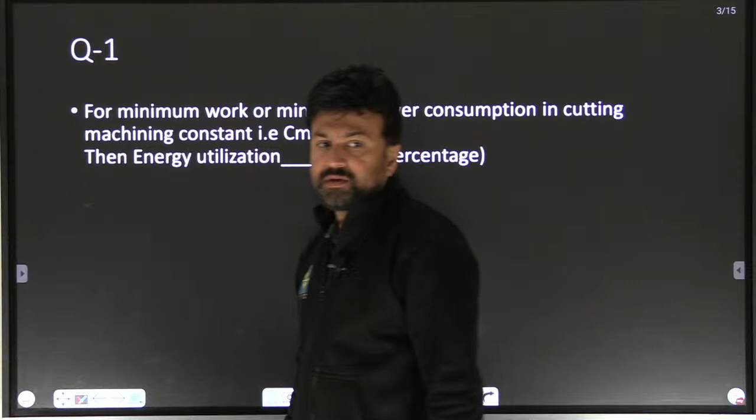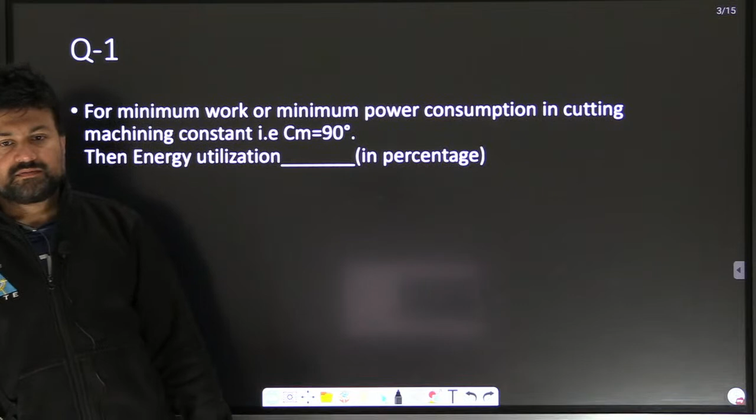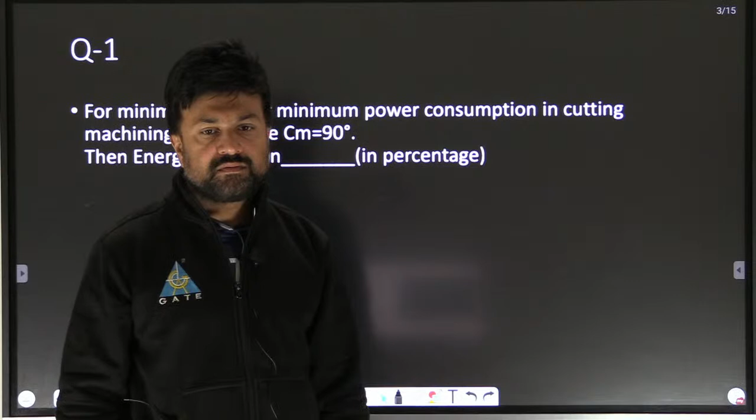Tell me the answer. Anybody? What happened? What about the answer? Who will tell me? For a minimum work or minimum power consumption in cutting, machining constant. Shall I explain? Shall I tell the answer? Yes or no, tell me.

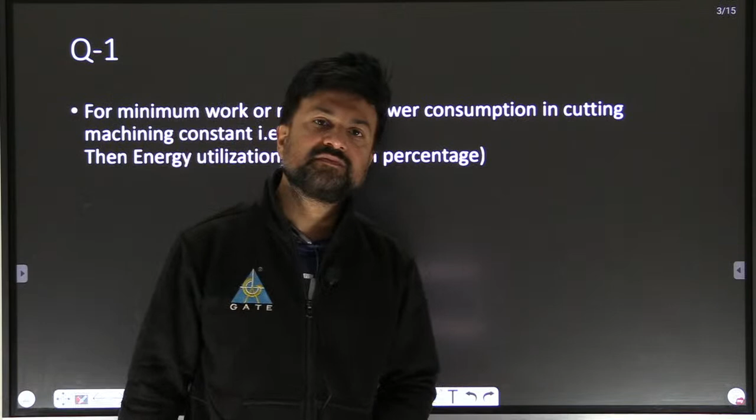Beta, the answer is 100%. In percentage, the answer is 100%. Now you may be thinking, sir, how? Beta, this question came directly from my theory, from my notes. Whatever I used to teach, that thing is directly from my notes.

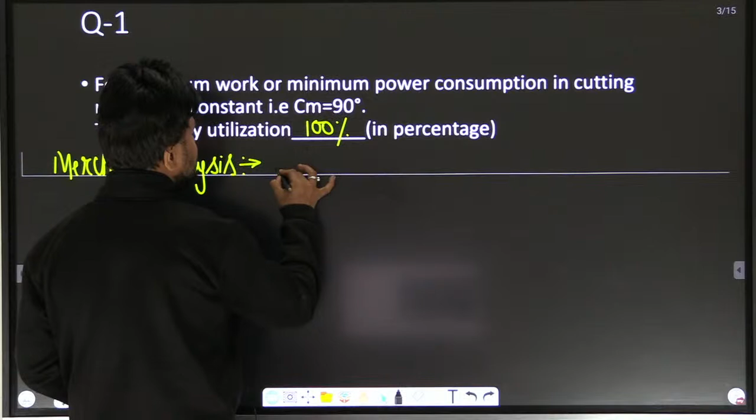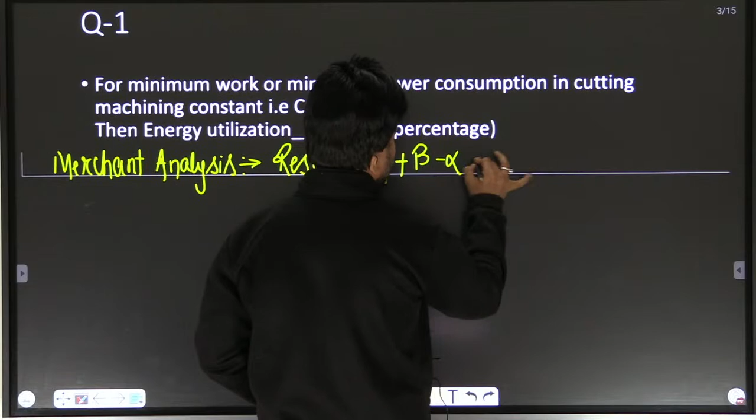You know Merchant analysis? Tell me, you know Merchant analysis? Yes or no? In Merchant analysis, you have a result. Merchant analysis result, what is the result? Result is phi equal to... result is what? 2 phi plus beta minus alpha equal to 90 degree. That is the machining constant.

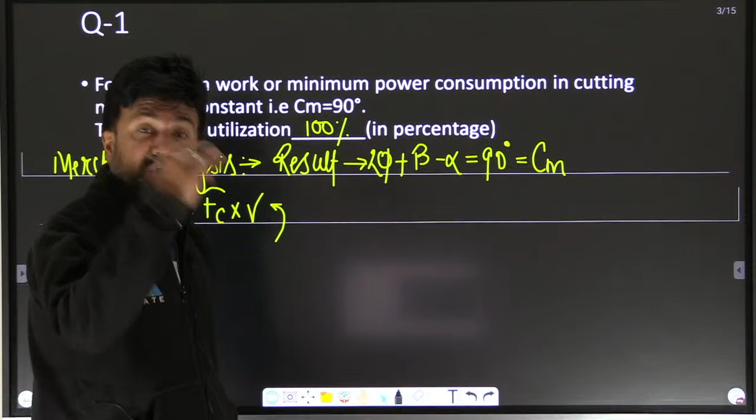You have proved this, and I'm not going to prove this thing here. This is the result which we got from the merchant analysis. And how do we start? We start with whatever the work done is, cutting force into cutting velocity. So whatever work we are going to apply in a workpiece to break the crystal, 100% of that work is going to be used to break the crystal. There is no loss of work. That was the assumption in that theory. And because of that assumption, you got that result.

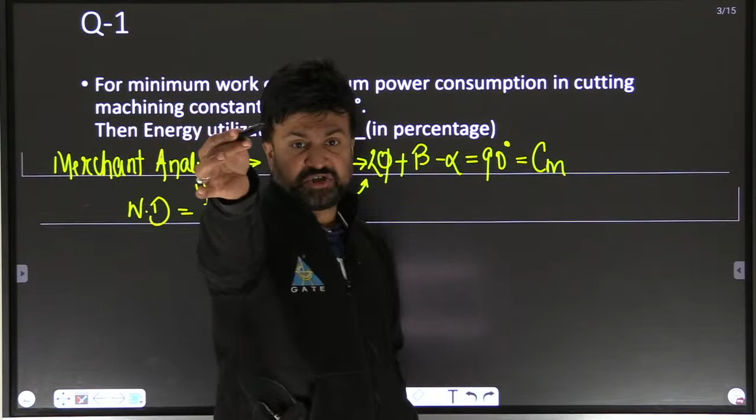Am I clear? Yes or no, tell me. To derive the merchant analysis result, that is 2 phi plus beta minus alpha equal to 90 degree, that is the machining constant, all of you know that. How does that result come? That result comes from the work done. Whatever work we put into the workpiece to break the crystal, to do the machining, that work is 100% transformed into breaking the crystal. There is no loss of work. So it comes only when the efficiency, the energy utilization, is 100%.

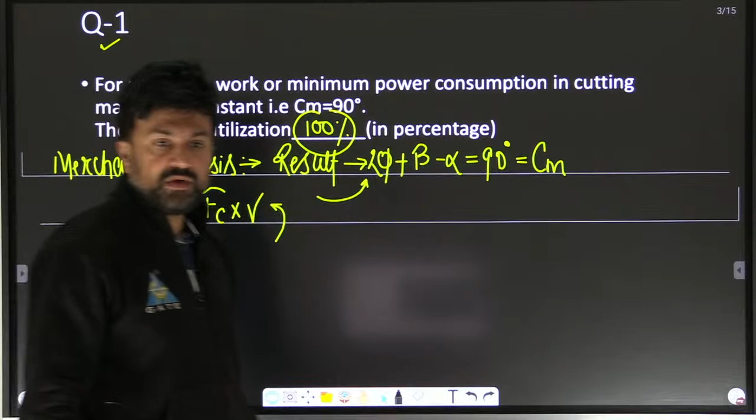Right, now the first question is over. I hope you enjoyed that question. This is a theoretical question, but it is a typical question. Now the next question, and I hope that all of you are able to solve this question.

This question is pretty simple, and I'm hoping that all of you are able to solve this question. So let's see who is going to solve this question. Yes, this is a pretty simple question, my dear student. Question number 2 is a very simple question.

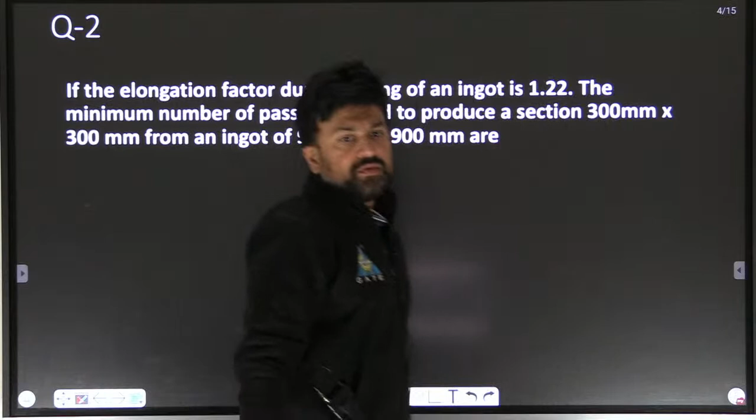And I told you during the revision classes, maybe you forget or not, but I told you. Yes, I told you in my revision classes. Have you seen?

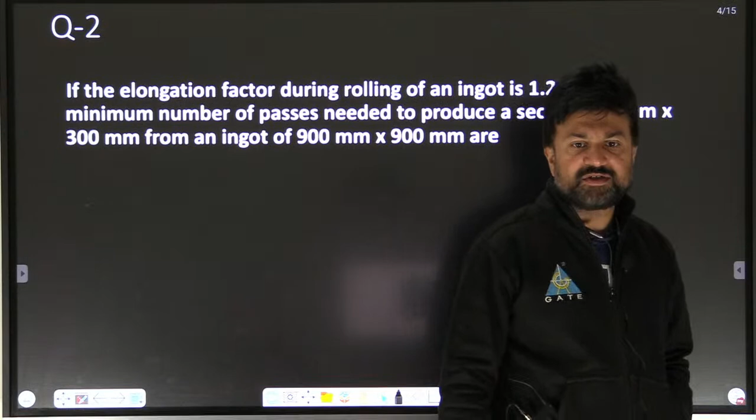Right, yes. So Dhruv Singh says 11, Ranveet Raj says it's 11, Akshar Jain says 11. Yes, 11 is the correct answer.

My dear, what is the elongation factor? Elongation factor E is your final length obtained after the rolling, divided by initial length, or you can say initial cross section area divided by final cross section area in one pass. Suppose you are doing multiple passes, then elongation factor to the power n is: final length after n passes divided by initial length, or initial cross section area divided by final cross section area after n number of passes.

So my dear, what is the elongation factor in the question? Elongation factor in the question is 1.22 to the power n. Initial cross section area is 900 cross 900, am I right? Divide by 300 cross 300. So it's 9. So what is the answer?

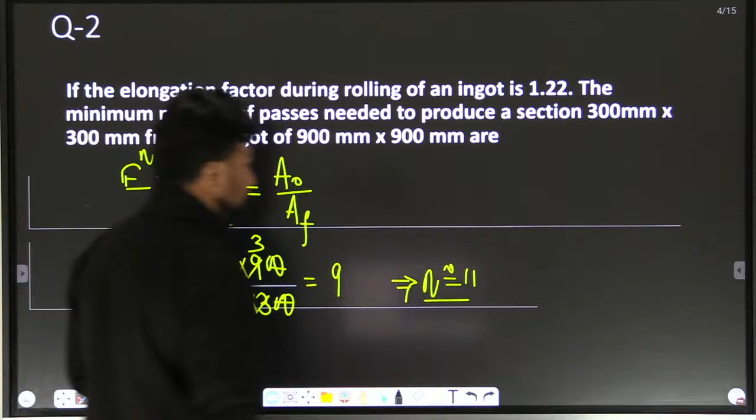Shall I solve? Are you getting n equal to 11? Are all of you getting n equal to 11? When you solve, approximately n comes to 11. Am I clear, my dear student? Is that question clear? Shall we move? Okay.

So let's jump to another question, that is question number 3. Solve this question number 3: the coefficient of friction and the chip thickness ratio, respectively, are to be found.

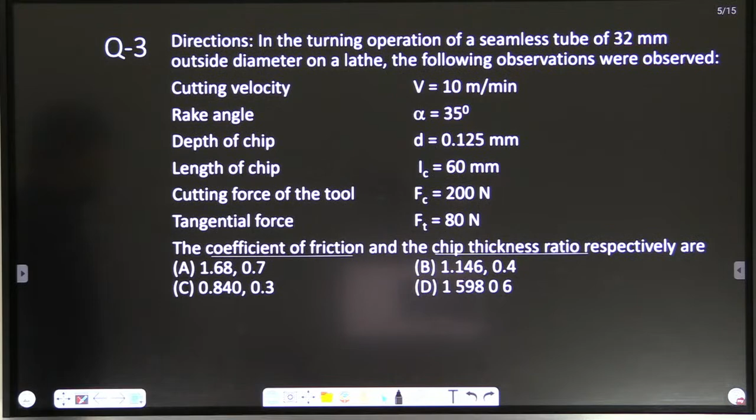Here the cutting velocity is given, rake angle is given, depth of chip is given, length of chip is given, cutting force of the tool is given, tangential force is given, and you have to find the coefficient of friction.

All of you know that coefficient of friction is friction force divided by normal force, am I right? I hope you got the idea of how you can solve the coefficient of friction with the help of friction and normal force. Three data are going to be used while solving for mu: cutting force, tangential force, and the rake angle. There is a famous relation I told you in my revision classes, by which you can directly solve.

This is 0.6, my dear, comma. And I think the coefficient of friction... yes, the coefficient of friction, my dear. Shall I solve?

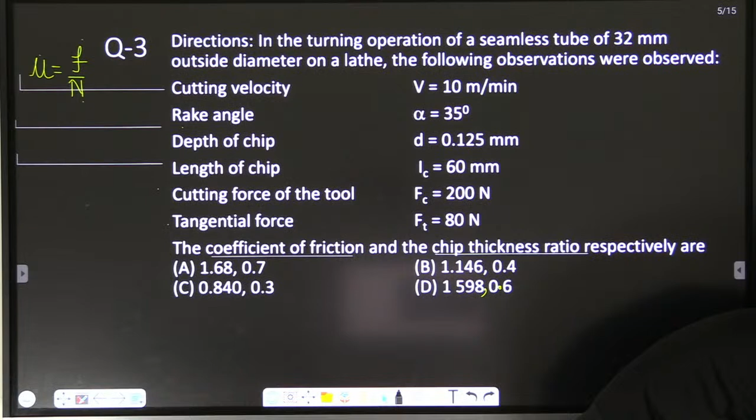Okay, tell me the chip thickness ratio. What is the chip thickness ratio? First of all, chip thickness ratio is what? T naught by Tc, or Lc by L naught. Am I right? So, my dear, it's Lc by L naught.

Lc is what? The length of the chip. Length of the chip is given, that is 60 mm. Divide by L naught. L naught is what? Pi d. Am I clear?

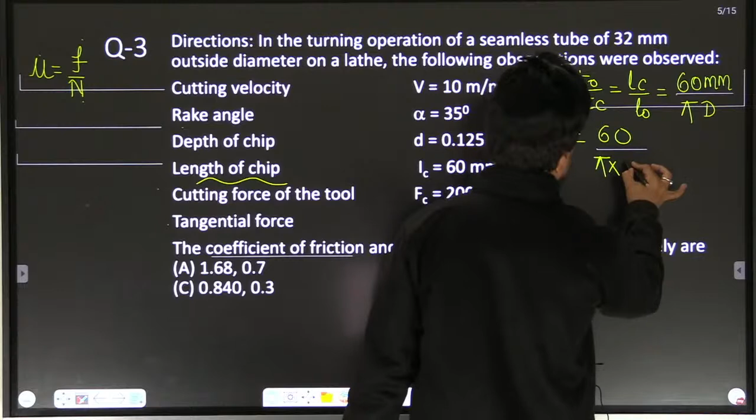So here chip thickness ratio is 60 divided by pi into d. Diameter is what? Diameter is given, directions: turning operation of a seamless tube of 32. So what is R? 60 divided by shift pi into 32. It is 0.59.

0.59. Okay, but directly you can see R equal to 0.59, or R is approximately 0.6. Only one option is there.

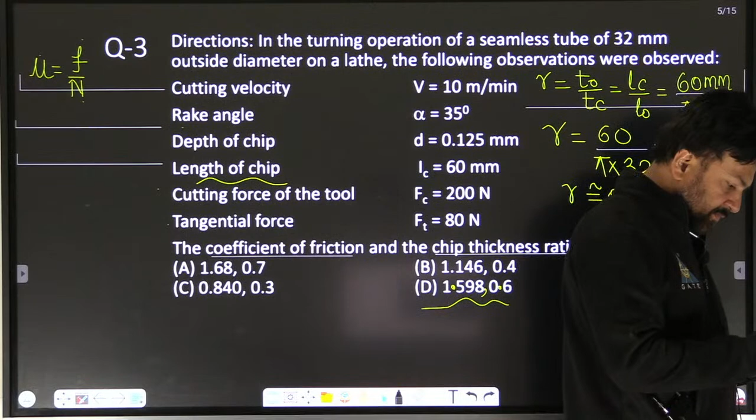But there is one thing. My dear, you can say D is the answer, but listen me carefully. Actually, here the options are little bit wrong.

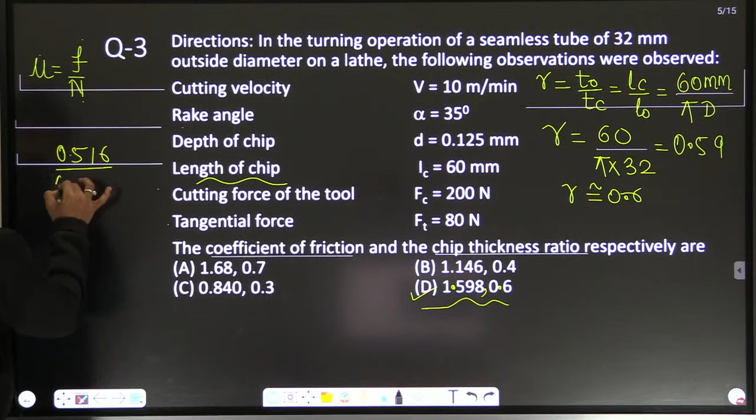Can mu be greater than 1? Is that possible? Tell me, yes or no, can mu greater than 1 be possible?

So how can you say that D is your answer? Actually, I'll tell you one thing - this question will not come in your exam, don't worry. I was solving an ESE conventional question from the 80s, there was a question in 1980 or 84.

There was a question: when mu is greater than or equal to 1, this formula is not applicable. In that case, you have to use the classical friction theorem.

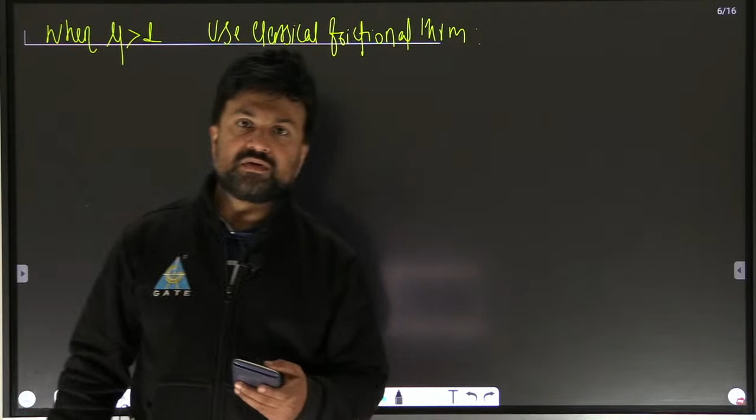When mu is greater than 1, in that case use the classical frictional theorem. But this is not mentioned in your GATE exam, okay, that's why I'm avoiding this.

And what is that classical friction theorem? Let me tell you: classical friction theorem is mu equals ln(1/r) divided by pi by 2 minus alpha. Alpha should be in radian.

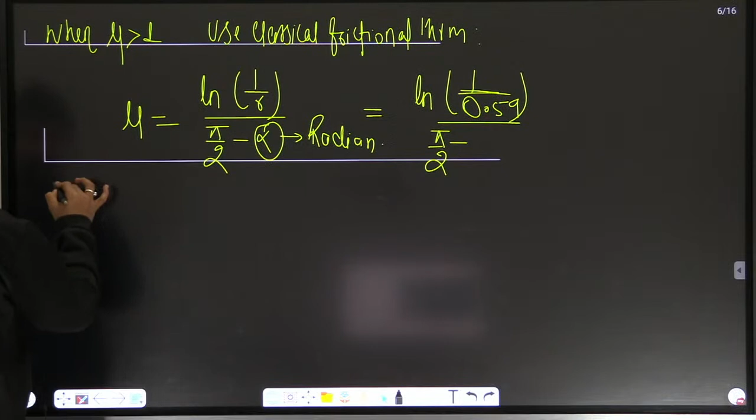So according to that, mu will be ln(1/r), and r is what? R you are getting 0.59, divide by pi by 2 minus alpha. Alpha should be in radian. You know 180 degree equals pi, so 35 degree equals pi into 35 divided by 180 degree.

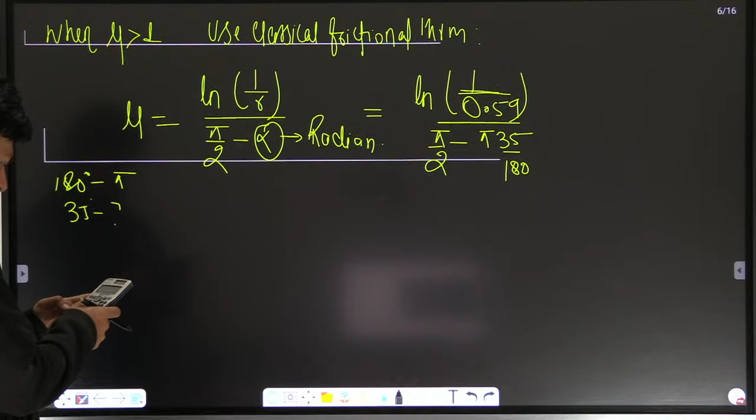Am I clear? So let's solve here. Minus shift pi into 35 divided by 180. So my dear, here it will become 0.53.

I know the option is not there, it's my mistake, purely my mistake. Option is not there. Actually the answer, if I am going to correction, is 0.53, okay, and 0.6. Am I clear?

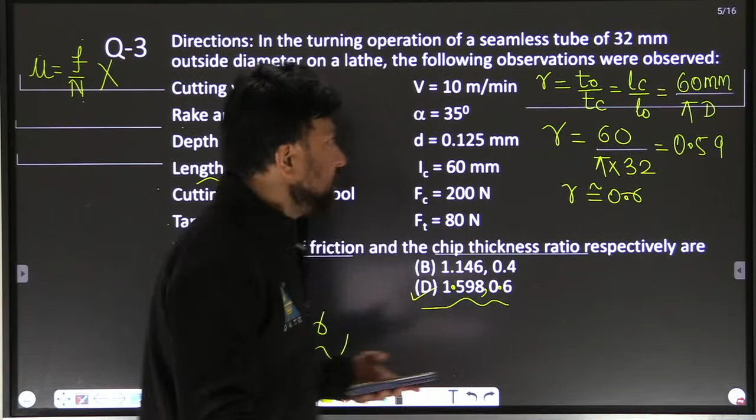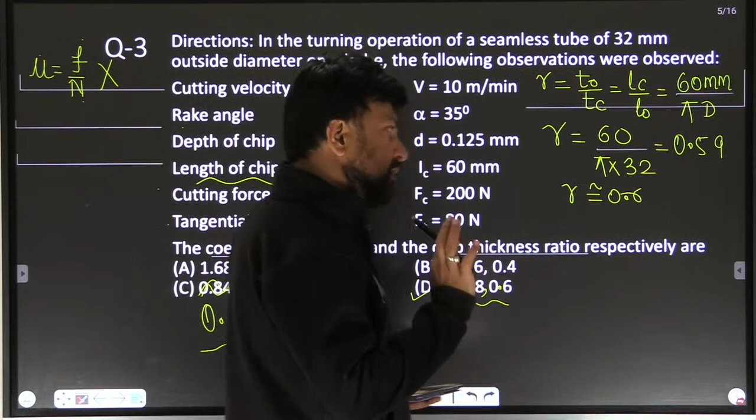But the thing is, this classical friction theorem is not mentioned in your GATE exam, right? So just forget this, it's my mistake. Actually this question is made by me, unfortunately I put this data in such a manner where I'm getting mu greater than 1. You have to always use this, because in the GATE exam, classical friction theorem is not mentioned in your syllabus, and GATE exam never asks classical friction theorem.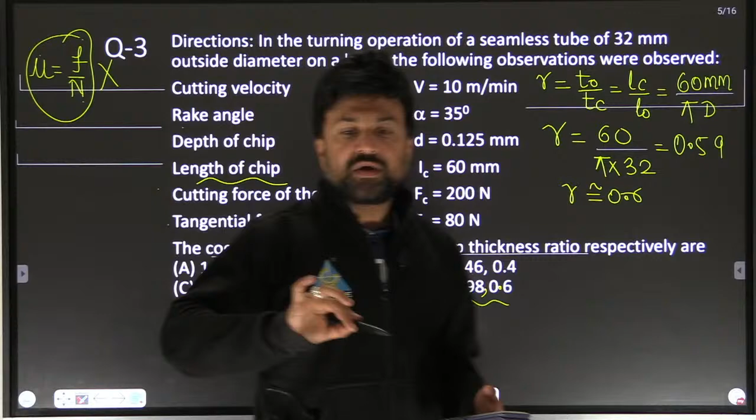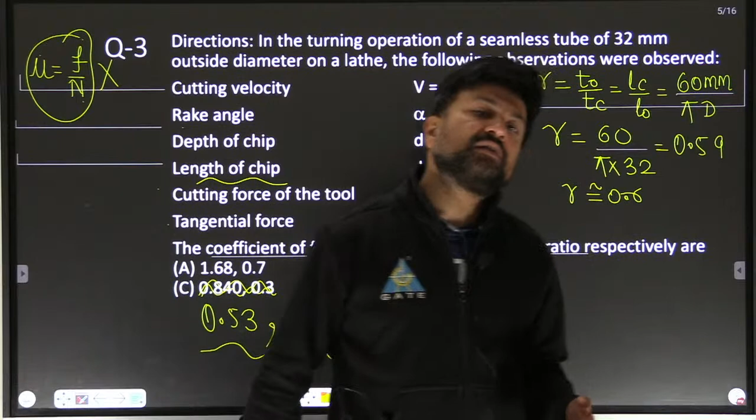So don't worry about that, it's my mistake that I put wrong data in the question, that's why you're getting mu greater than or equal to 1. Am I clear? So it's my mistake - if all of you are not able to solve this question, all of you will get plus marks from this question, right? Am I clear? Just forget classical friction theorem, because GATE never asks classical friction theorem.

By mistake I put the wrong data, that's why you're getting mu greater than 1 from F by N, right? It's my mistake, so just leave this question. Now, this is question number 4.

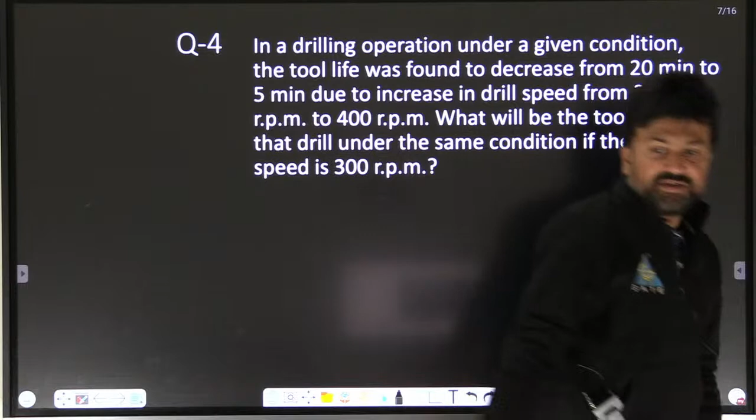Suppose that if mu is greater than 1, then in this way you can solve this. Suppose by mistake in some other exam you are getting mu greater than 1, by F by N, then you apply the classical friction theorem. Now solve this question.

In a drilling operation under a given condition, the tool life was found to decrease from 20 to 5 minutes due to increase in drill speed from 200 RPM to 400. T1 and V1, or N1 RPM, T2, N2. 20 minutes... let me write down in a clear manner.

What is the question? T1 equal to 20 minutes, it goes to T2 5 minutes when you increase the speed from 200 to 400, that is N1 200 RPM to N2 400 RPM. What will be the tool life of that drill under the same condition if the drill speed is 300 revolutions per minute? Tell me please.

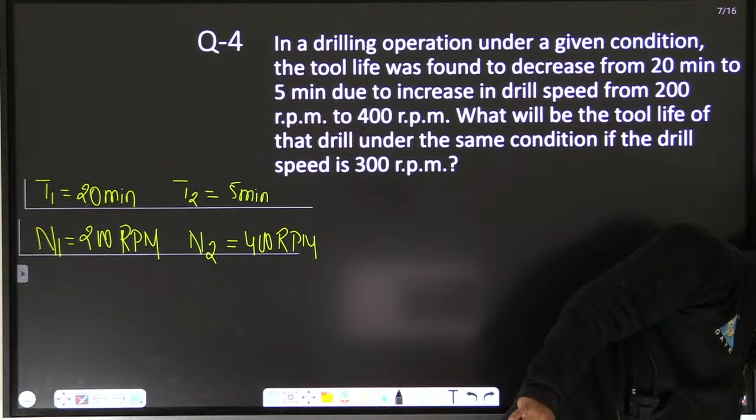Yes, right, the value of tool life is 8.88 minutes. Let me solve this question in a very short manner.

Here you can write N1 T1 to the power n equal to N2 T2 to the power n. N1 is 200 into T1, that is 20 to the power n. N2 is 400 into T2, that is 5 to the power n. When you solve this, you will get the value of n. So what will be the value of n? n will be 0.5.

n will be 0.5. So when you place N1 T1 to the power 0.5 equal to N3 T3 to the power 0.5: N1 is 200, T1 is 20 to the power 0.5, N3 is 300 RPM and T3 is what we have to find, T3 to the power 0.5. It becomes T3 equal to 8.88 minutes. Am I clear?

Now the next question, please.

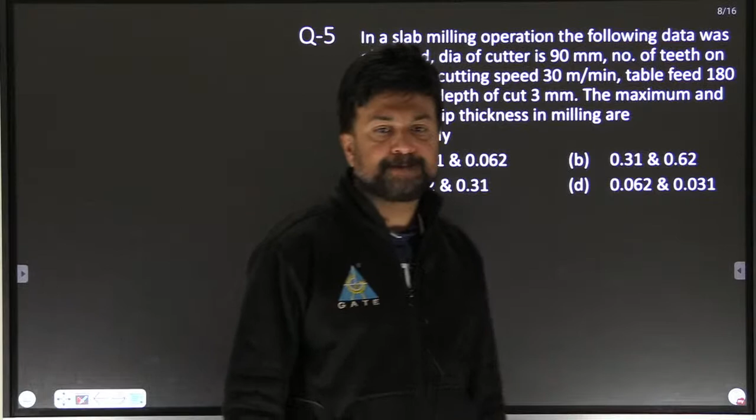You have to find the maximum and average chip thickness in milling. Do you know the formula, or have you forgotten the formula?

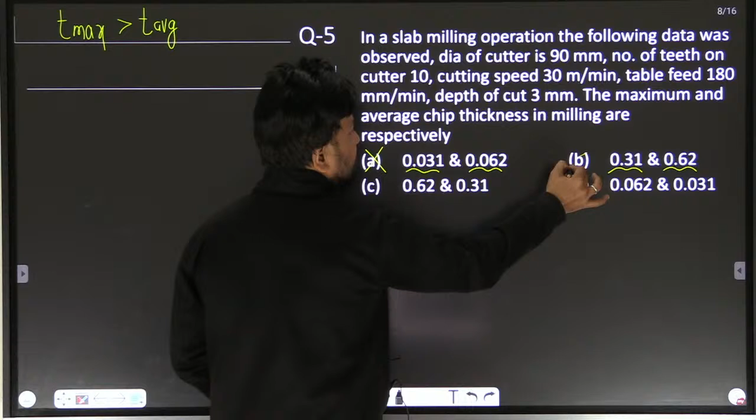These two options... my dear, tell me, T maximum is always greater than T average, right? Yes or no? So how can it be possible that maximum is less than average chip thickness? So this is not my answer. First of all, two options are eliminated.

So you can find the T average. What is T average? T average is Fz into root of depth of cut divided by milling cutter diameter. But you don't know the value of Fz, but you know the table feed, that is capital F equal to Fz into number of teeth into RPM. Here RPM is not given. Here the cutting speed is 30, this is given. So cutting velocity is pi dn divided by 1000.

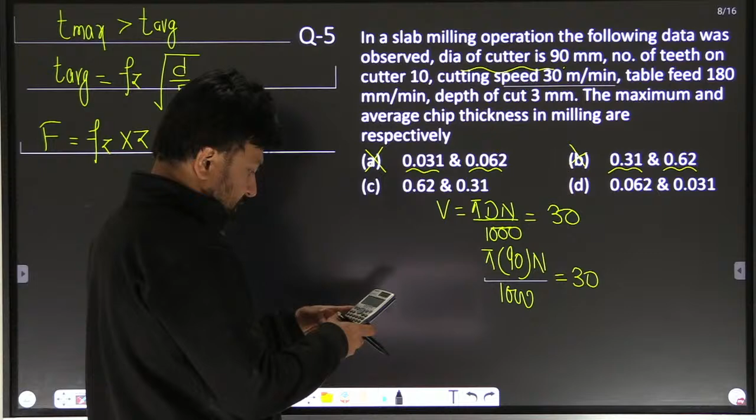So V is 30, and diameter of the milling cutter is 90, so pi into 90 into n divided by 1000 equal to 30. So you will get RPM: 30 into 1000 divided by 90 into pi, the RPM is 106.103 revolutions per minute. So just put here the table feed, 180 mm equal to Fz into Z, where Z is the number of teeth, 10, into 106.103. So 180 divide by 10 into the answer, Fz comes to 0.1696 mm per tooth.

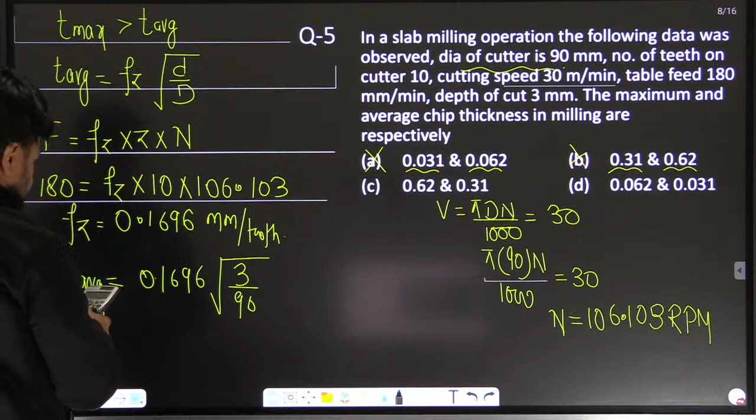So what is T average? T average is 0.1696 into root of D, the depth of cut, which is 3 divided by 90. So it is 0.03. And twice of that is T maximum. Am I clear? Okay, let's move to another question.

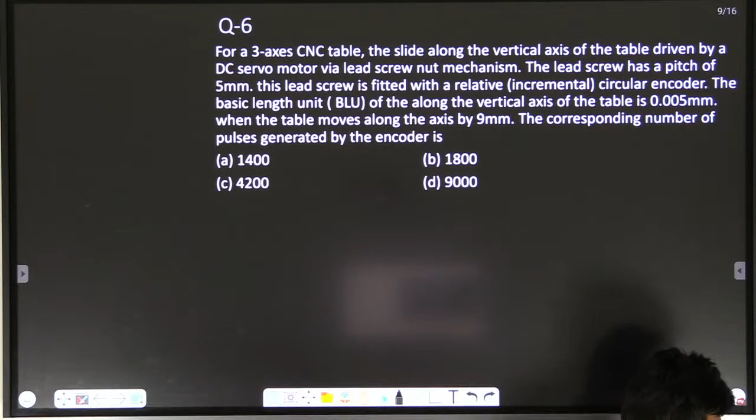Number of pulses required. In a 3-axis table, the slide along the vertical axis is driven by a DC servo motor lead screw. The lead screw has a pitch of 5 mm.

This lead screw is fitted with a rotary encoder. The basic length unit of the vertical axis is 0.005 mm. When the table moves along the axis by 9 mm, find the corresponding number of pulses generated by the encoder.

Here, the basic length unit is 0.005 mm. And what is the pitch? Pitch is 5 mm.

You know that BLU equals pitch divided by number of pulses per rotation. So here, BLU equals pitch divided by number of pulses: 5 divided by 0.005. It becomes 1000 pulses.

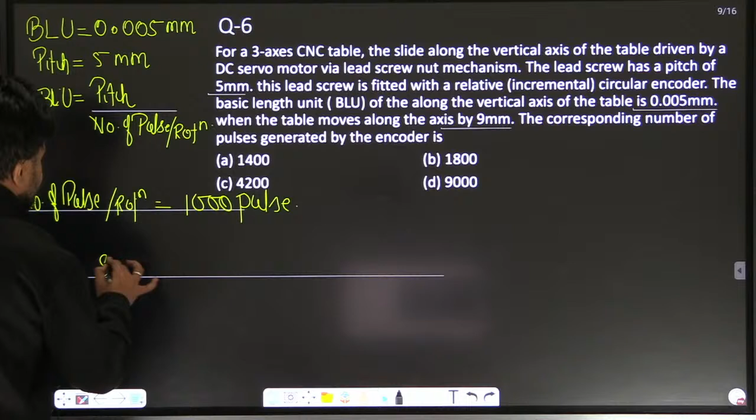It will become 1000 pulses. For 5 mm linear motion, we need 1000 pulses.

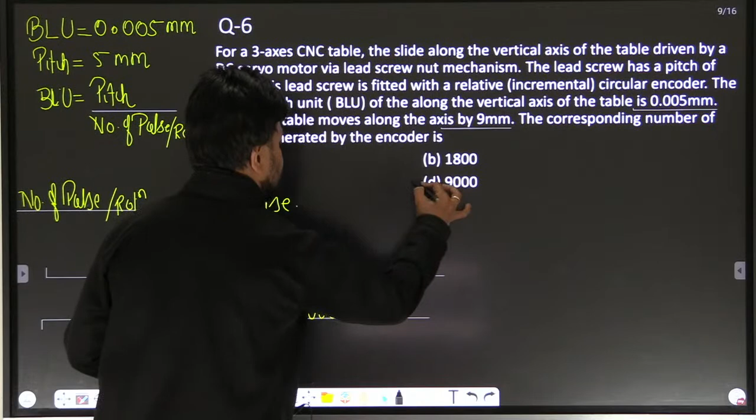So for 9 mm linear motion, how many pulses are required? That is 9 divided by 5, multiplied by 1000, which gives 1800 pulses.

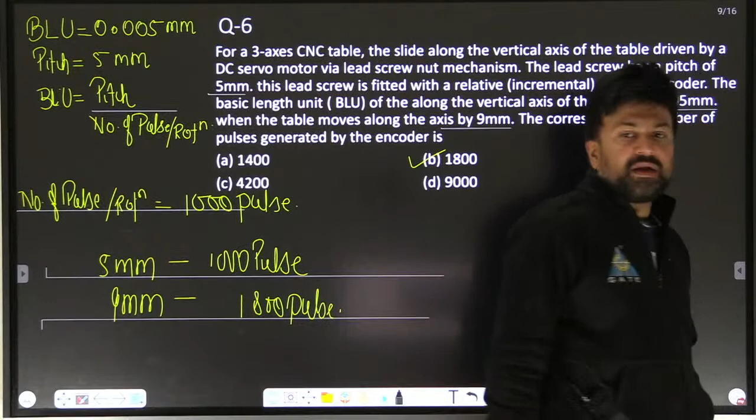So what is the answer? It is not D, the answer is B. Dhruv Singh, Vishal Tyagi, Akshat Jain - you gave option D, but the actual answer is option B. Am I clear?

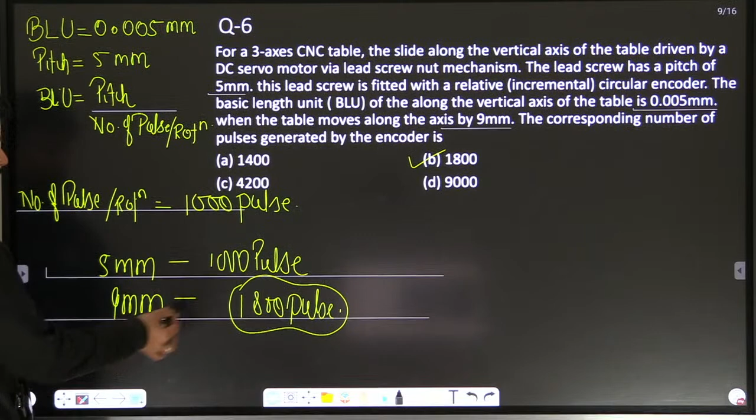Are you getting this? How are 1800 pulses coming? For 5 mm linear motion, we need 1000 pulses. Then for 9 mm linear motion, how many pulses are required? It's simple 10 plus 2 mathematics.

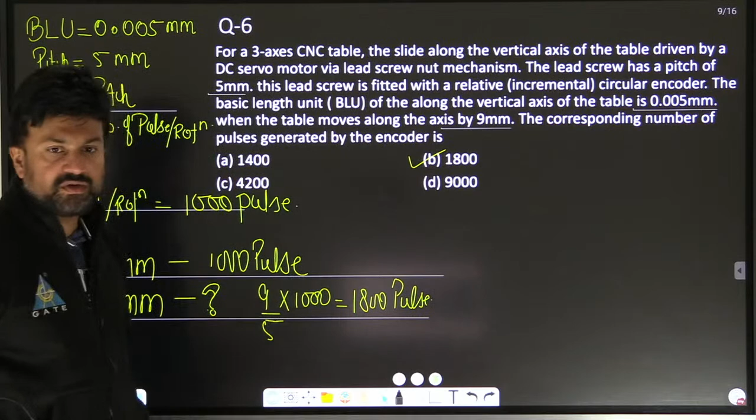For 5 mm linear motion, we need 1000 pulses. Then for 9 mm linear motion, how many pulses are required? This is 9 into 1000 divided by 5. Then it comes to 1800 pulses.

Yes, Vishal Tyagi. This question I explained, this question was explained in your revision class. Do you remember? This question was explained in your revision class.

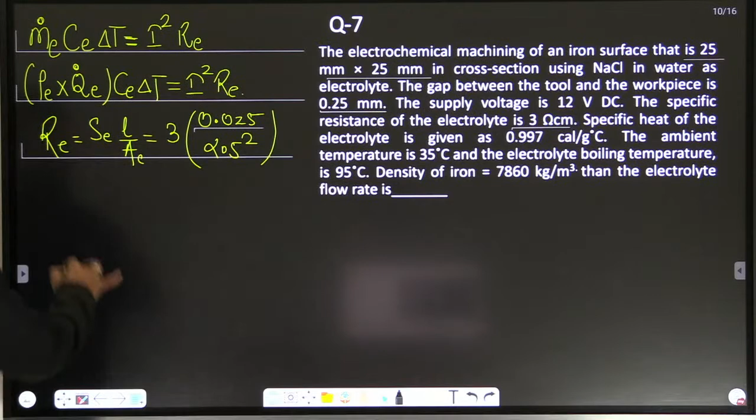Resistance of the electrolyte equals specific resistance of the electrolyte times length of the gap, divided by cross-sectional area of the electrode. Specific resistance of the electrolyte is given as 3 ohm centimeter. Multiply by L, the inter-electrode gap, because current flows in that gap, which behaves like a current carrying wire. The inter-electrode gap is 0.25 mm, so it becomes 0.025 centimeter. Cross-sectional area is 25 mm by 25 mm, so it is 2.5 square centimeter. This gives you the resistance of the electrolyte.

Resistance of the electrolyte value will be 0.012 ohms. This is the resistance of the electrolyte through which the current is passing, and this is where the heat is produced.

Current is not given to us, so how can you find the current? You can find current density into specific resistance of the electrolyte, V minus delta V divided by Y, by this formula, or you can directly find it by another formula.

That formula is V equal to I times Re. Applied voltage is 12 volts. I is what you have to find, and Re is 0.012. So applied current will be 1000 ampere. Now you have the resistance of the electrolyte through which current is passing, and you have the value of current and resistance.

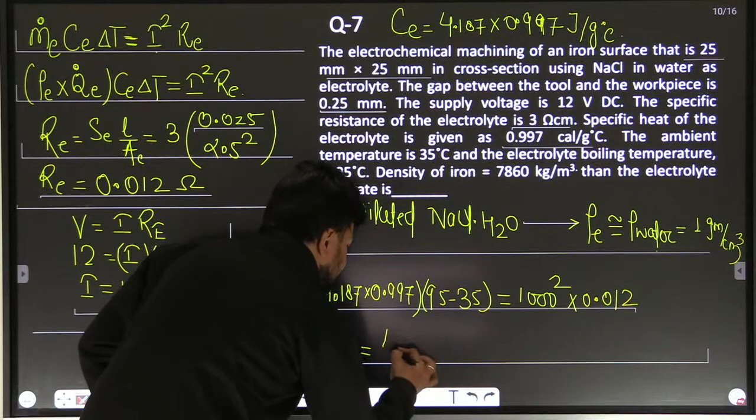So here the flow rate of the electrolyte is 47.99 centimeter cube per second. I have to mention that the flow rate should be in centimeter cube per second. It is not a 3 digit number, it will be a 2 digit number in centimeter cube per second.

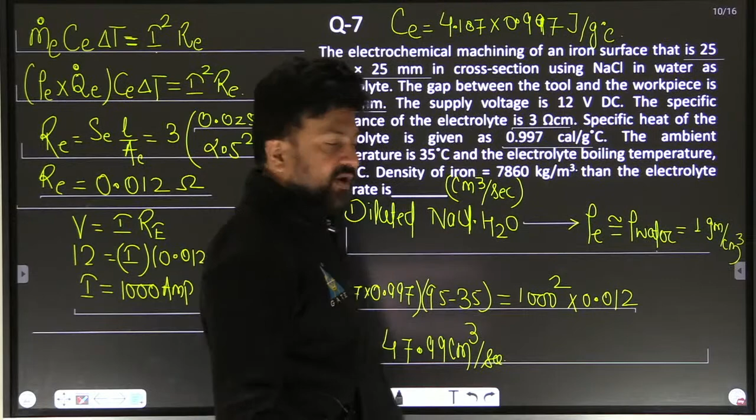Am I clear to all? Is that concept understood?

Shall we move? Okay, next question. It's a direct question, my dear. This question I'm not going to solve. I told you this 110 times in my revision class.

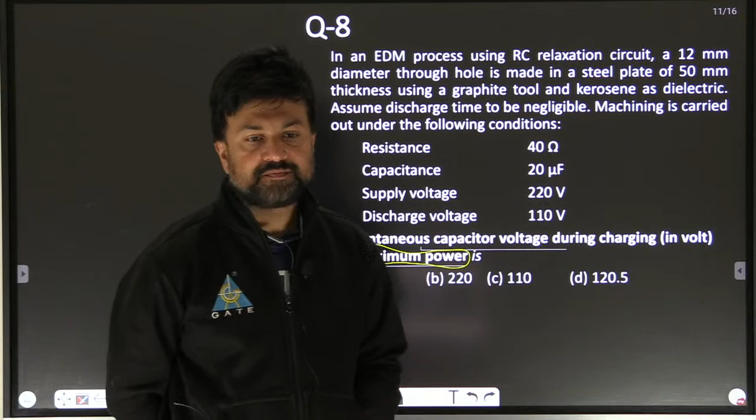For maximum power, this is a very good question. Please focus on that line for a maximum power. Instantaneous capacitor voltage during charging for a maximum power. For maximum power, instantaneous voltage for the capacitor, that is VC, equal to what?

0.72. 0.72 times of what? V naught. Am I clear? This question is totally new. He is asking maximum power, so please remember this relation. This is a derivation for maximum power. VC equal to 0.72 times of V naught. Am I clear or not?

Okay, this is a new question. The GATE exam will ask this type of new question. So, what is VC? VC is 0.72 times of supply voltage, that is 220 volt. Right, 220 volt.

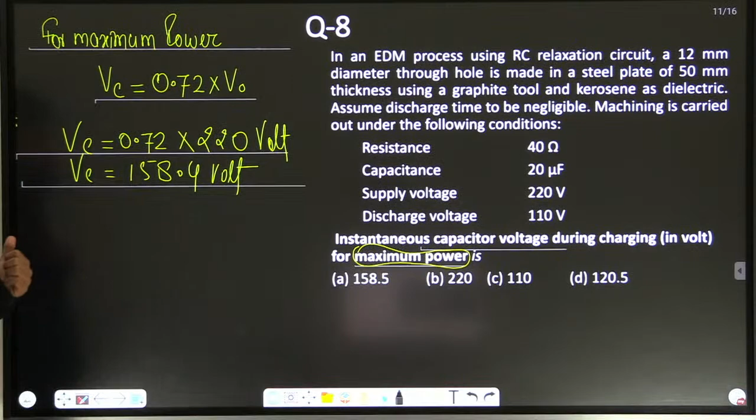Now the next question, I am not going to solve this one, remember. This is a very, very easy question.

Yes. This question I am not going to solve, remember. Yes.

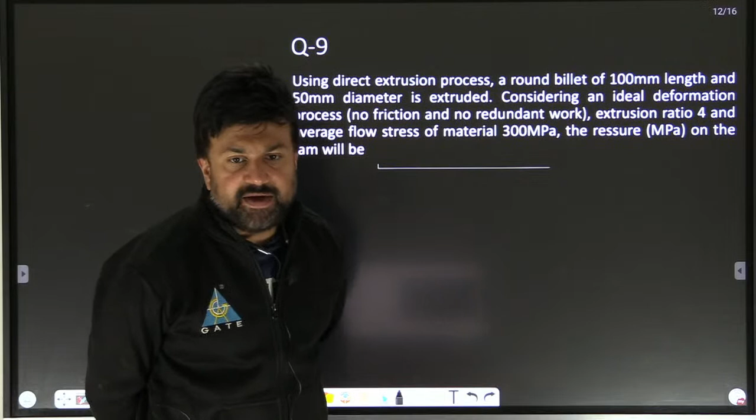What is the answer? 415. Yes, almost all are giving the right answer. The answer is 415, right? Or 415.8 megapascal.

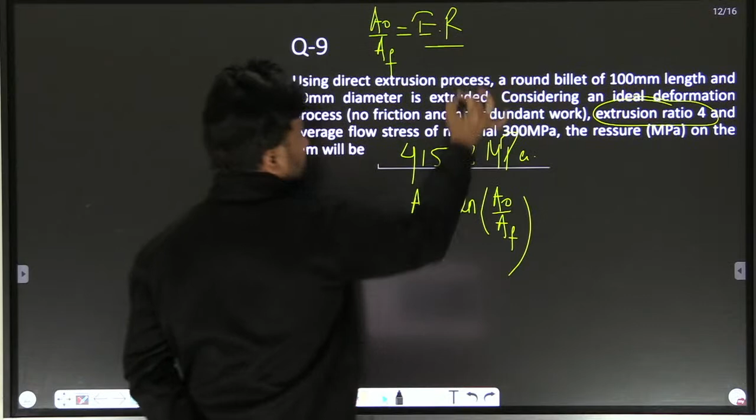0.8 megapascal. And you know the applied formula? That is A naught sigma naught ln A naught by A final. And you know A naught by A final is the extrusion ratio, and here extrusion ratio 4 is given. So directly you have to put extrusion ratio A naught by A final. A naught is given, sigma naught is given. Okay, now solve this question.

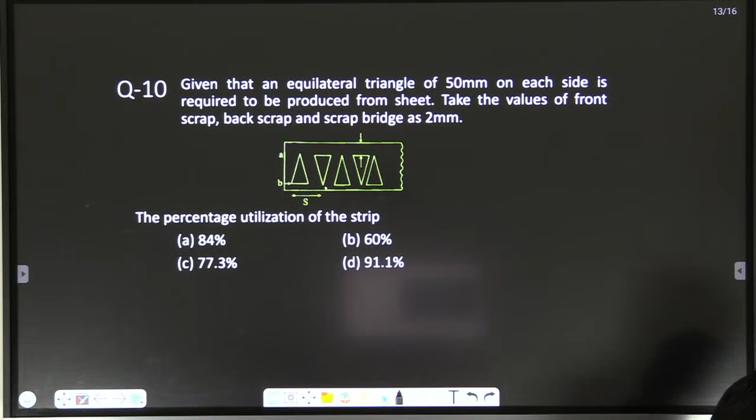Yes. Solve this type of question: percentage utilization of the strip.

Given that an equilateral triangle of 50 mm on each side is required to be produced from a sheet, take the value of front scrap, back scrap and scrap bridge as 2 mm. The percentage utilization of the strip is?

My dear, the formula is very simple. This type of question was asked in the last GATE exams. So the percentage utilization is area utilized divide by total area of sheet. Am I clear?

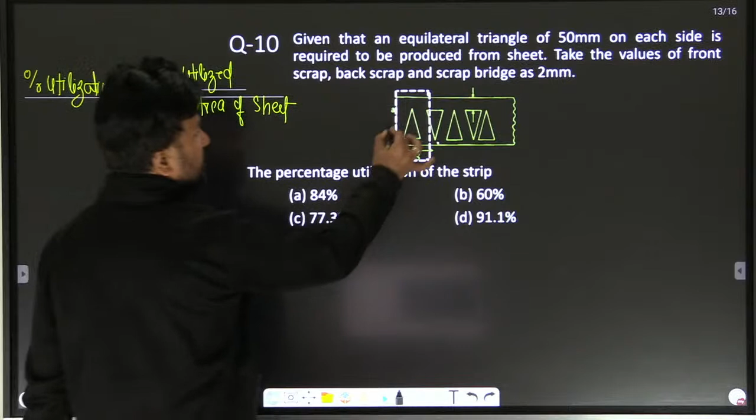So suppose here, just focus on this portion. In this sheet you are producing this blank from this sheet. So what is the area utilized divide by total area of the sheet? Am I clear? Divide by total area of sheet.

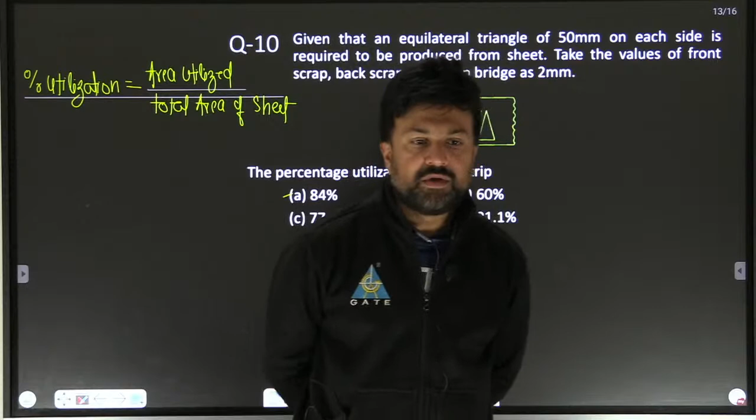Okay, this is the applied formula, area of utilization divided by total area of the sheet. Am I clear? Will you try by yourself?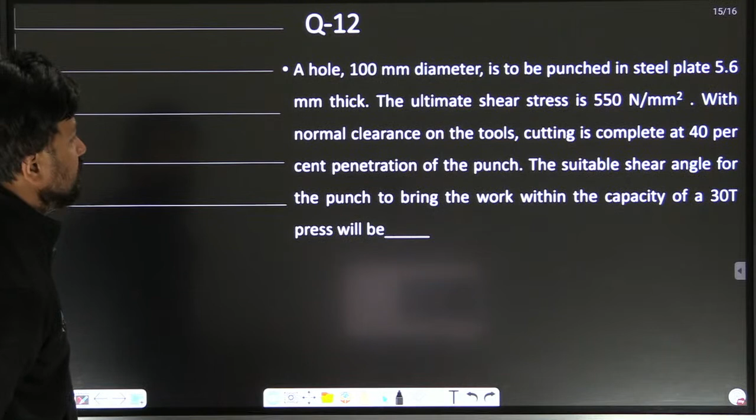You have to find the suitable shear angle. 30 T, T stands for tons, and 1 ton equals 9.81 kilonewton. When you apply the shear, that is Fs, you know Fs equals F maximum into percentage penetration into thickness, divided by shear plus penetration thickness into T.

When you give the shear on a punch, the force comes to 30 ton, and 1 ton is 9.81 kilonewton. F maximum into PT divided by S plus PT. Am I clear? So what is F max? F max is perimeter into tau into T naught.

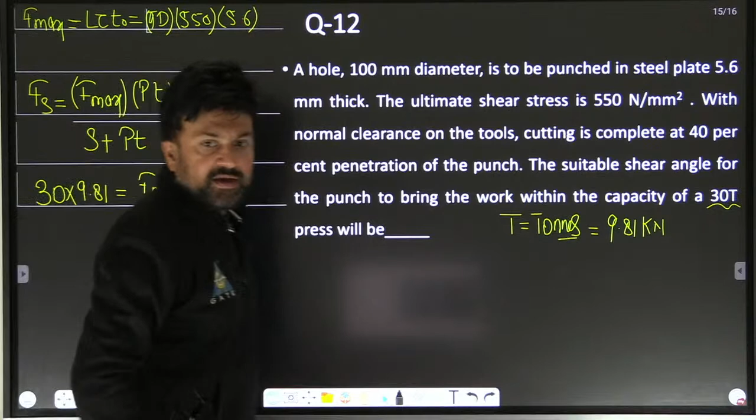What is the perimeter? Pi d into tau. Tau is 550, and T naught is 5.6. So pi d is basically 100. Again writing: 550 into 5.6. So shear force is pi into d into 550 into 5.6. Answer divided by 1000 is 967.

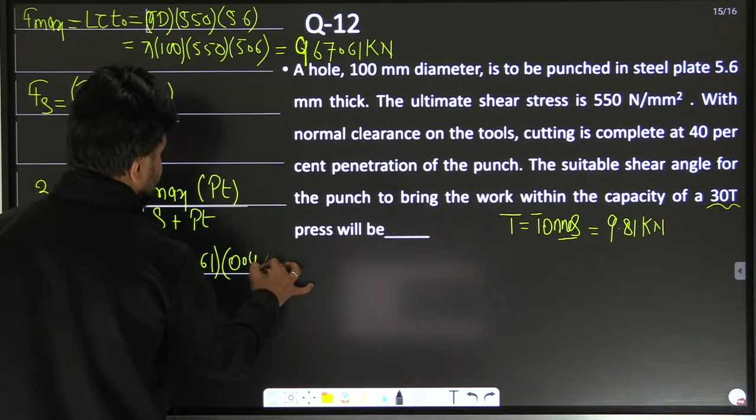It is 967.61 kilonewton. And it is also equal to 30 into 9.81 kilonewton, equal to 967.61. Percentage penetration is 40, so 0.4 into 5.6 divide by S plus 0.4 into 5.6. You will get the value of shear.

So here the answer is: answer into 0.4 into 5.6 divided by 30 into 9.81, answer minus 0.4 into 5.6. So here shear is 5.12 mm. Here the punch is circular, my dear.

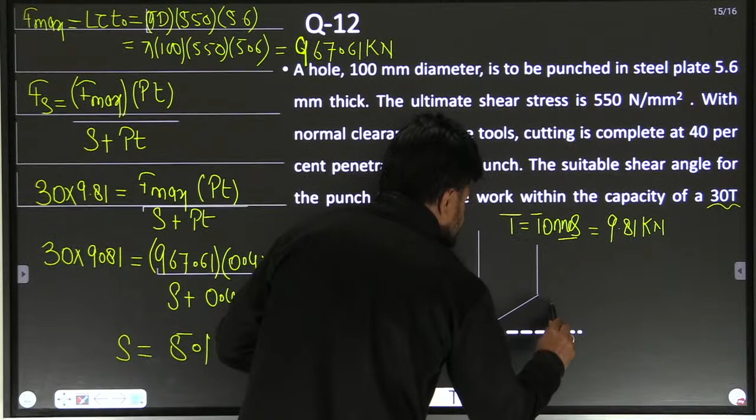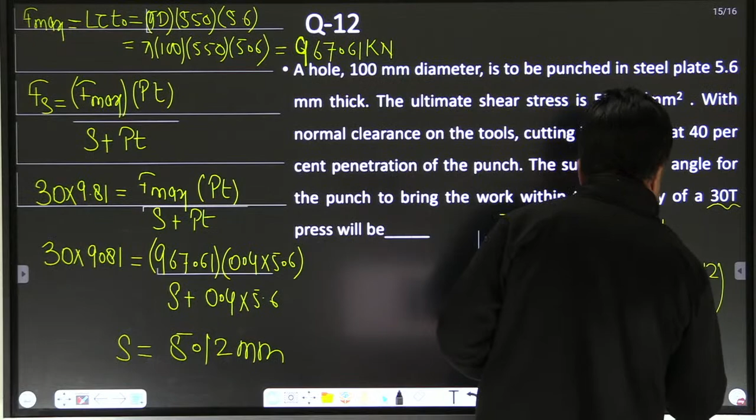So when you give the shear, this is the shear height, that is 5.12, and this is the shear angle. This is the diameter D, 100. So you can find theta S equal to tan inverse of 5.12 divided by 100. Here the answer is 2.93 degrees.